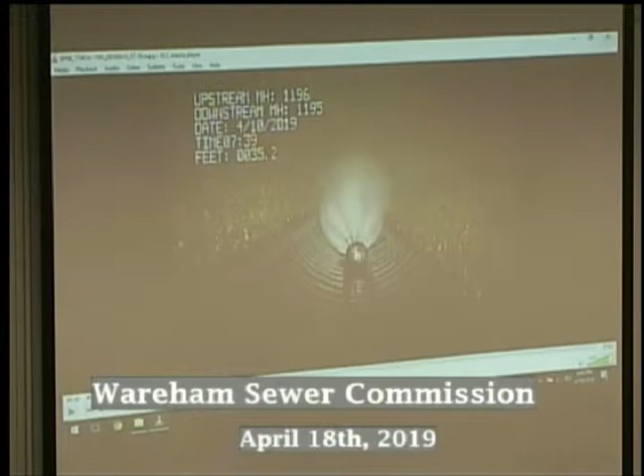Well, Pinehurst is a mess, but I'm sure you've already been told that. It's a tricky job. We're going to have to work with the tides. There's no getting around it. Very short windows of opportunity. But a lot of debris and a lot of junk out there. I don't know if it's from hurricanes or what, but there's all kind of stuff in the ground out there. We run into a situation where at about 5 feet down, it turns into silt sand that you could actually sink to China. There's no end to it, so we got to be careful with that. And we have to think about how we're going to stabilize that a little bit as we go out there.

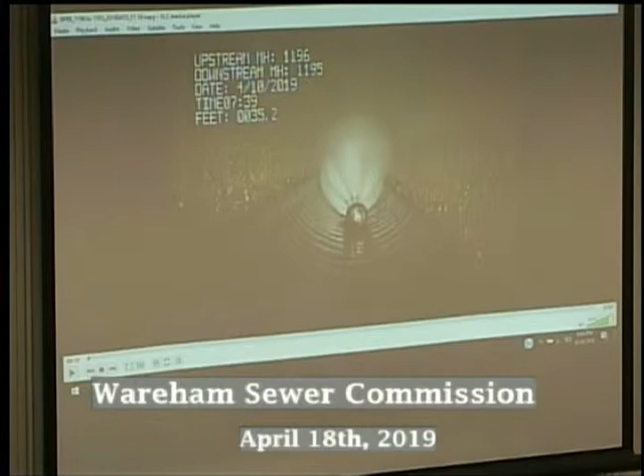Other than that, it's just, you know, a tricky project. Now, is that going to be something that'll be able to be lined? We can line it. We'd want to use double or triple layered woven S-glass, so it'll be actually stronger than steel when you get done with it. Be more ductile than steel. In deflection, it'll be about 4 times stronger than steel, so it'll take a lot more load.

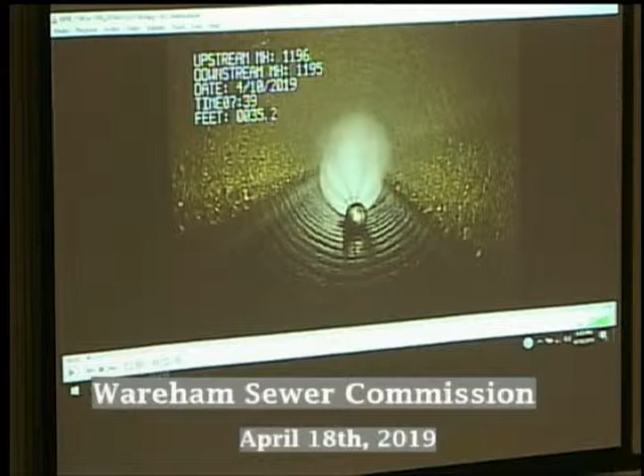So you're going to lose, say, 1/4 inch of the interior of the pipe, but you'll wind up with something with a flex mod of around 1.5 million to 2 million PSI, where steel has 35,000 in that load. So it's definitely an option. You said there was an awful lot of silt there. Once you rebuild the manholes, will they have to settle again?

Well, I don't think they'll be nowhere near as apt to settle because they'll all be one continuous piece of material. The liner will be monolithic, not segments every 20 feet the way it is now, which is subject to lots of problems. If you start getting a leak in a joint, it'll start pulling the sand in and make a hole underneath. So you're going to get away from that. And then the liners will also be tied to the structures.

And I was suggesting to Guy that as we go from manhole to manhole, we should stabilize all the soil underneath with a grout material that will gel up all that sand and stop that sinking and make it somewhat more buoyant at the same time. So instead of just pushing down through a little bit of sand, you'd be pushing down through a big mushroom of this material. So I think we're going to stop the sinking completely, to be honest with you.

How far do you think we're going to have to go on this whole thing? How far do we have to go? I would do anything that's out on that beach, because you can't go back to them a dozen times and say we need to go out on that beach again. So I think we need to go right around that point. And once you get around that little cove, it goes back up into high land, right? It goes back up Cottage Street, yes. Yeah, everything in that cove needs to be done.

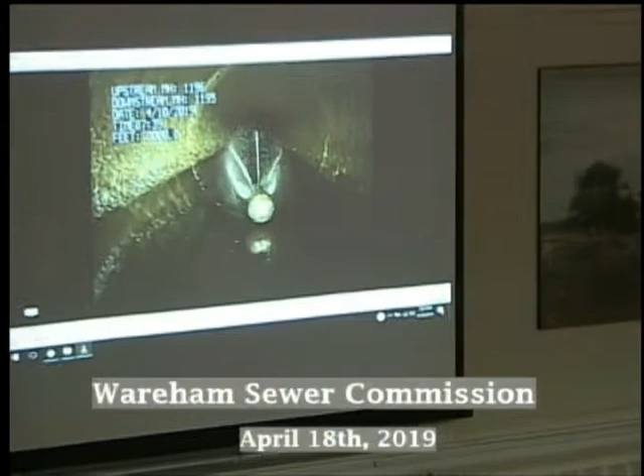Okay. Now you want to go. Okay, so we'll put that aside and go to the film. Now, what I have here is the video of the pipe before we lined it. As we go down, one thing I want to point out, you can actually see the ribs. Not the actual metal, but you can see the ribs because the concrete is that deteriorated. This is before, so we'll show you that, then the finished product. This is 20-something minutes, so we'll just give you segments of it.

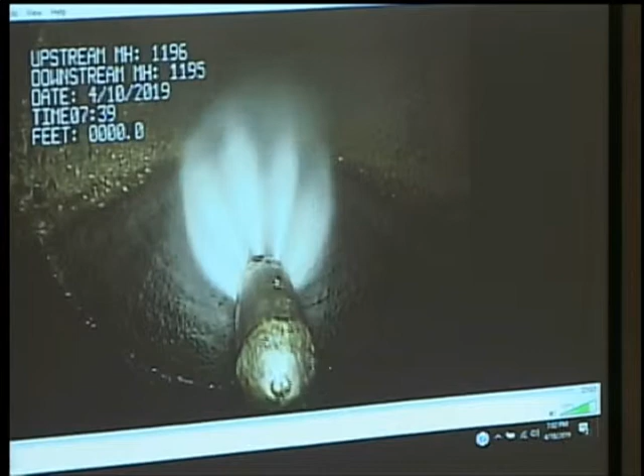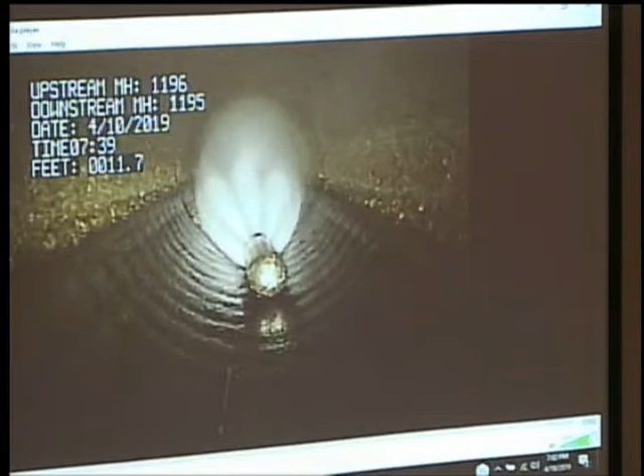Is this the jet rotor? Is this the Swiss Beach one? Yes. They're cleaning it before they actually do the lining. So tell us what we're seeing. What's the bottom and what's the top? You're looking at two different materials. The dark down below is where the water level pretty much always stays, so bacteria has been eating the bottom. At the top, where it looks like little rocks, that's where the bacteria has oxygen, so it's a lot more active. Every 4 inches there's a rib. That's the reinforcing wire, the inner ring, the circle, and the outer rings in longitudinal. So we've lost a lot of pipe.

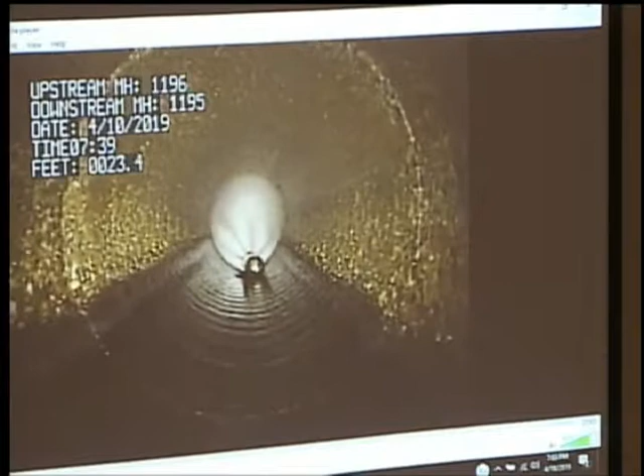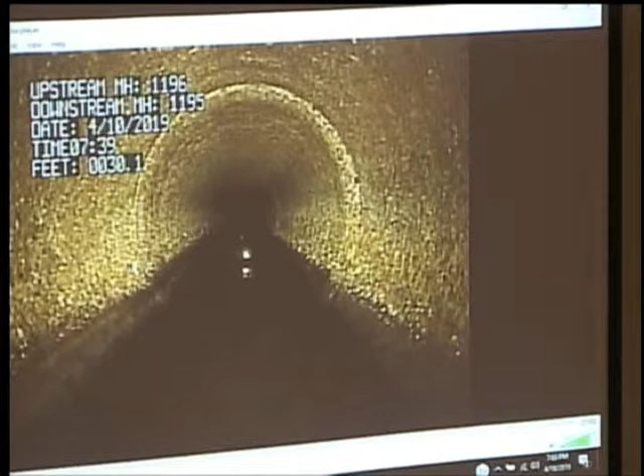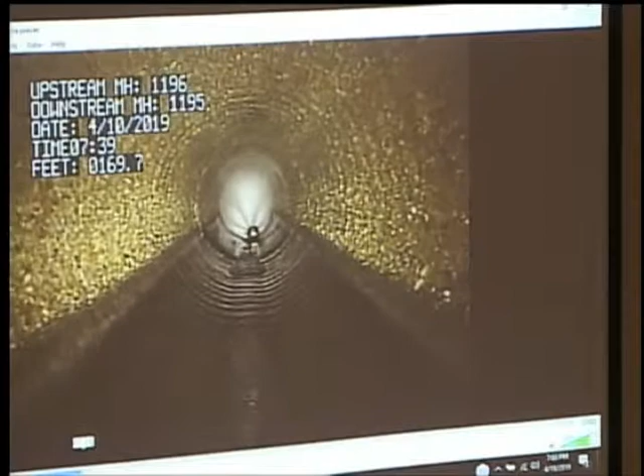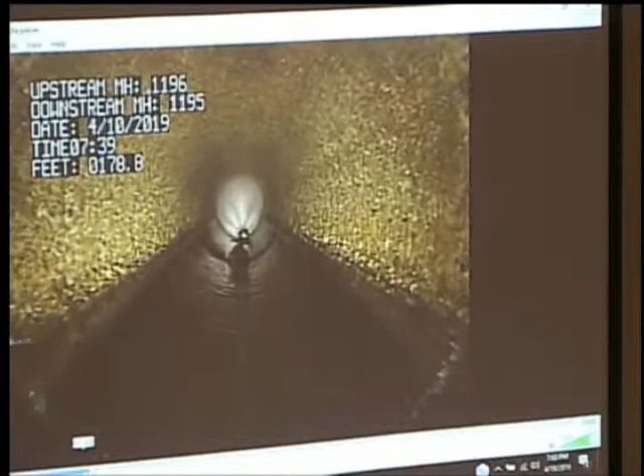SEA engineers in Boston figured all this out and put it together for the MWRA with the loss rate and that type of stuff. But it's true. You go back and look, and it's amazing how much you lose once it gets through that cream, because that's what's blocking the fumes, the acid, from getting into the concrete. What's that ring right there? That's a joint between pipes. It's a joint? Yep.

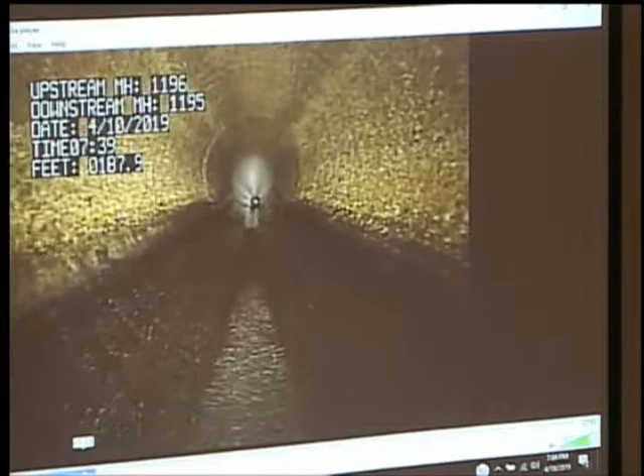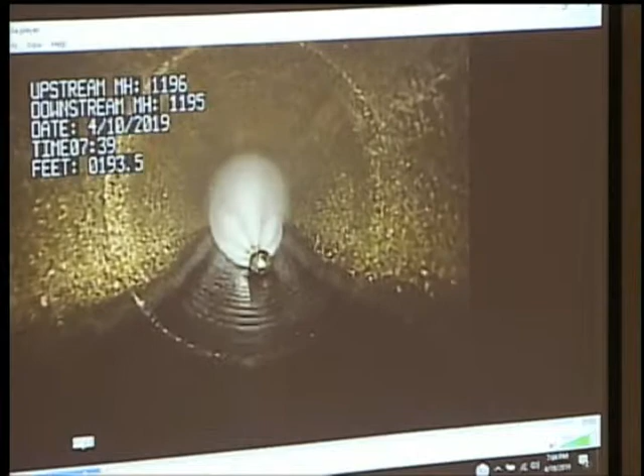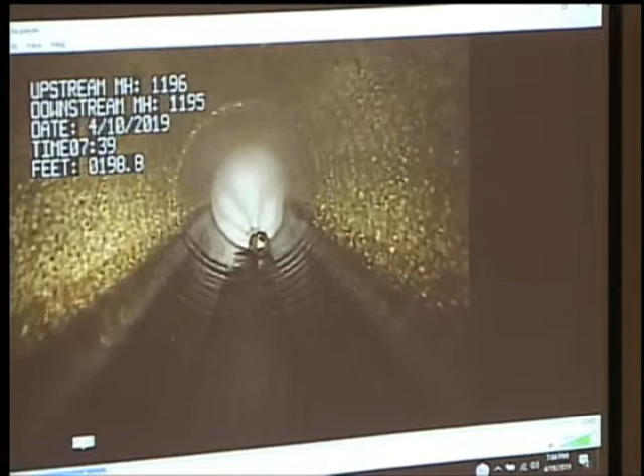See, that's what I was saying before. Once you line these, even on this size pipe, we've engineered these bags to be stronger than that was when it was brand new. So that can totally go away. It's great you have it, but you don't need it. So now it's one continuous monolithic piece of plastic and reinforced fiberglass the whole distance.

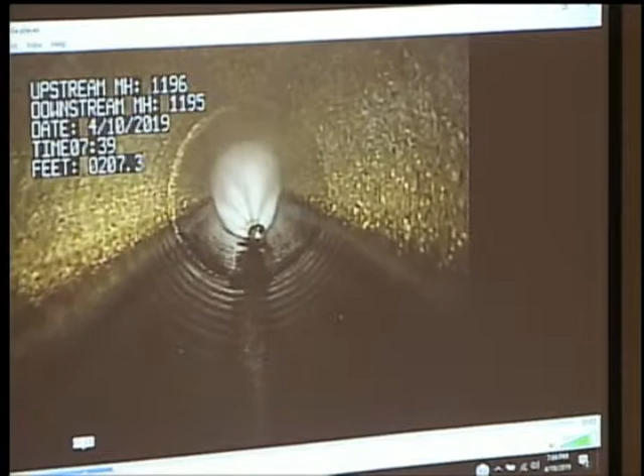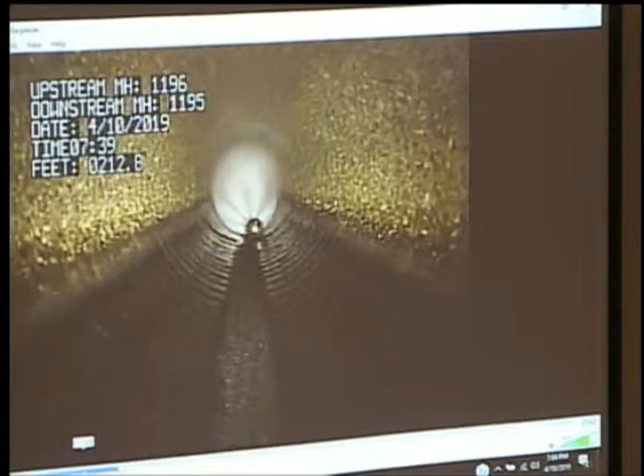No, it's just like an extruded piece of pipe that just doesn't end. Yep, yep. What we do is we know the measurement. We add another 15 feet to each measurement, so there's no chance of falling short. And then we cut those pieces out so we can come out into the manhole. We leave a bevel so we can tie the whole structure together as one. So then the whole structure stays as one.

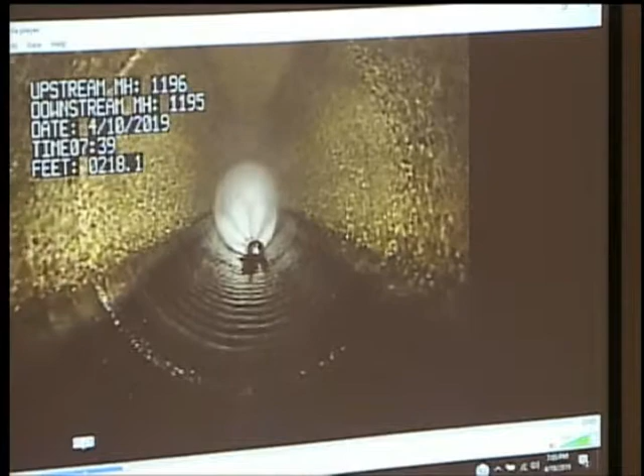And just to point out, one of the features is because it adheres to the pipe. Most lining is a pipe within a pipe; there's no adhesion. This material actually adheres to the pipe, becomes part of it to make it more structurally sound. See what it did to the brick? You can actually see how we had to, so that's an example of adhesion, and that makes this unique.

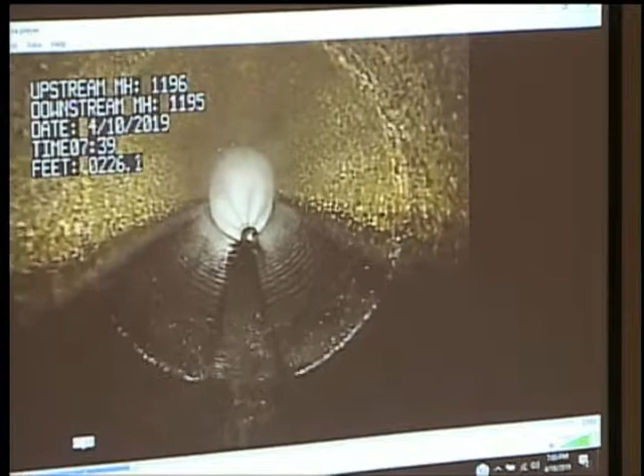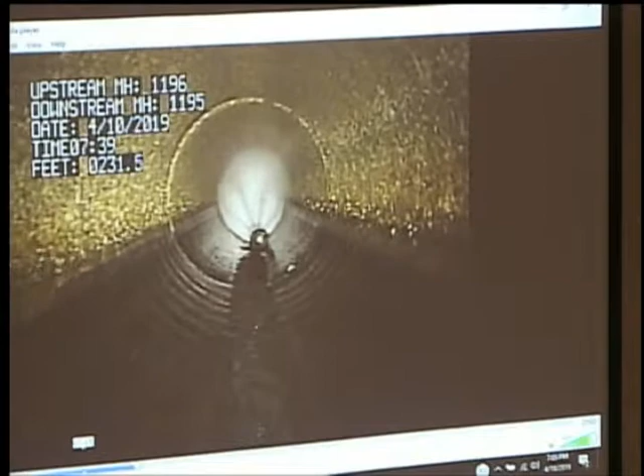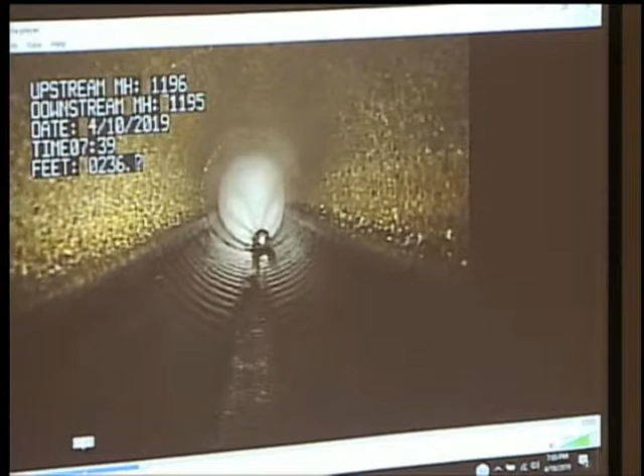Now, here's the other thing. Up in Revere right now, a friend of mine has the contract. They went in with one of our competitors and lined the whole town and were like, yippee, we're out of this. Nope. The situation got worse instead of better because they didn't stick to the pipe. So then the pipe was carrying the water straight to the next manhole from leaking around the pipe. It takes the least path, dumps out into that manhole, goes into the other pipe and goes straight on to the treatment plant.

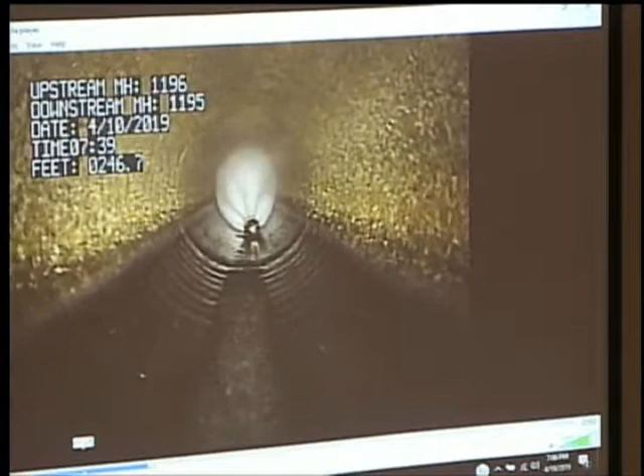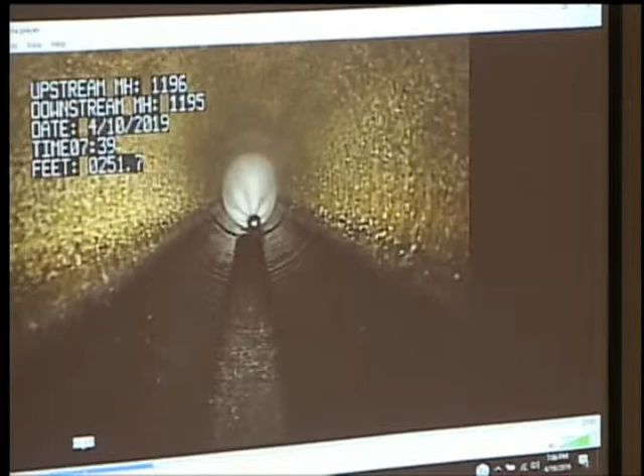So they thought they were done. They weren't. They just issued a multi-million-dollar contract because now every lateral has to be lined, every manhole has to be tied in, everything has to be done, and they weren't expecting it. And I was with the mayor of Quincy two weeks ago at the DEP. There was a congressman there. They've spent millions and millions just to find out that it didn't work, and they are absolutely livid about it.

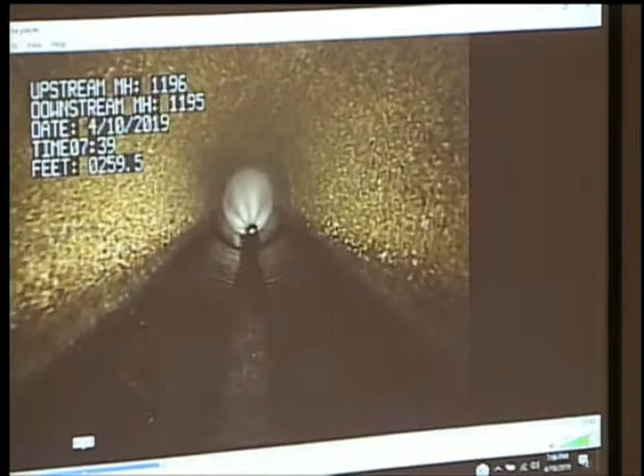Now, we've gone 255 feet down here. I haven't seen any connection point, or would I? You will see one. Some of the lines don't have but one or two, some might have 15. This one, I think there's one in this one. Now, that's another thing about this, where that lateral goes up to the house. This is what they're facing up in Quincy, Cambridge, all over the place. That lateral leaks because they don't connect.

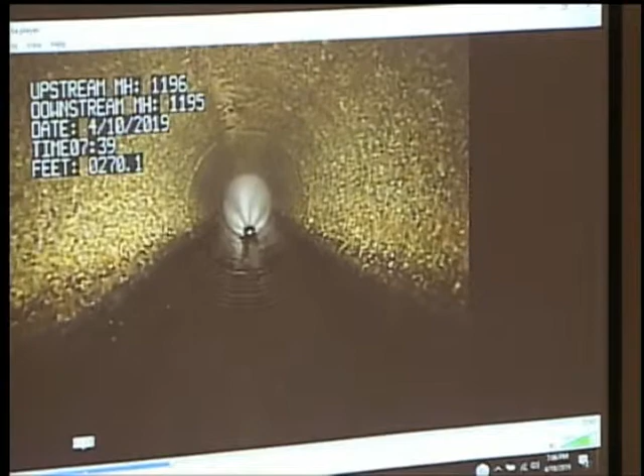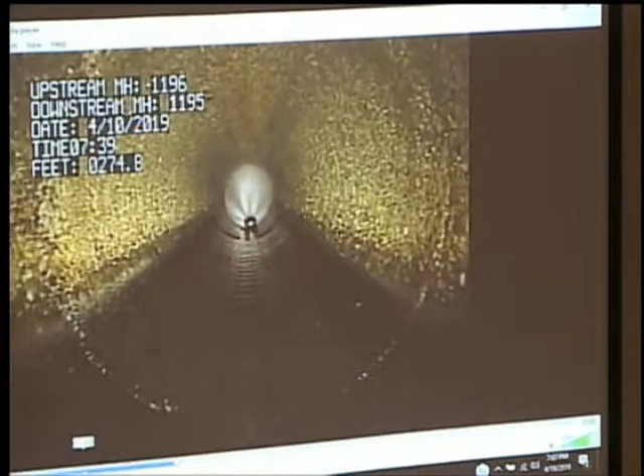When this liner's going forward, there's like a ring, like a donut of raw resin, the excess resin as it's pushing forward. And that ring fills in; like you'll see when we go back through, every imperfection in there is going to be sealed off. But it pushes up in the lateral going back to Mrs. Johnson's house. And you'll see when they cut it out, that resin went up inside and locked those two together, so there's no leaking at all.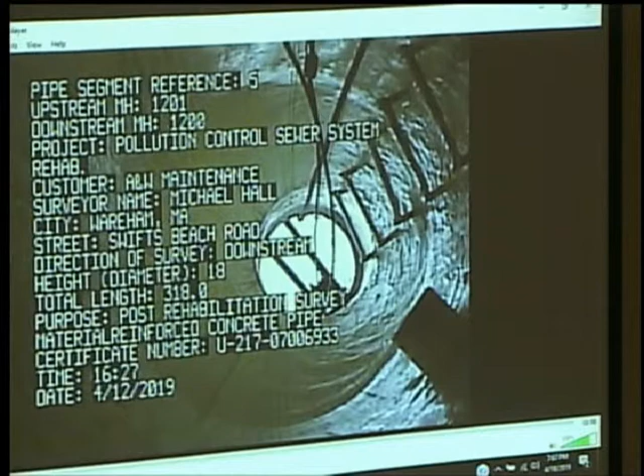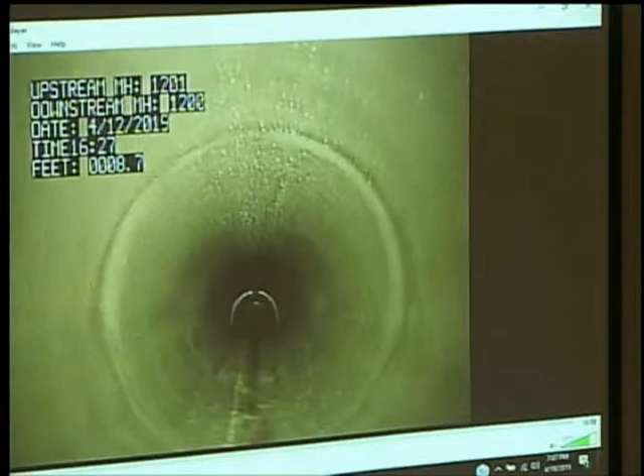So now we'll show you a lined pipe, because this is just going to continue. We'll show you a pipe that's lined so you can see for yourself the difference. It's manhole to manhole, they named them. So what we did, just so we could keep the job alive when we had the nightmare of the wrong liner, we did the manhole, so we'll go back now and tie everything back in together. We're gonna do that this week while they're fixing the repair. But this is the finished product.

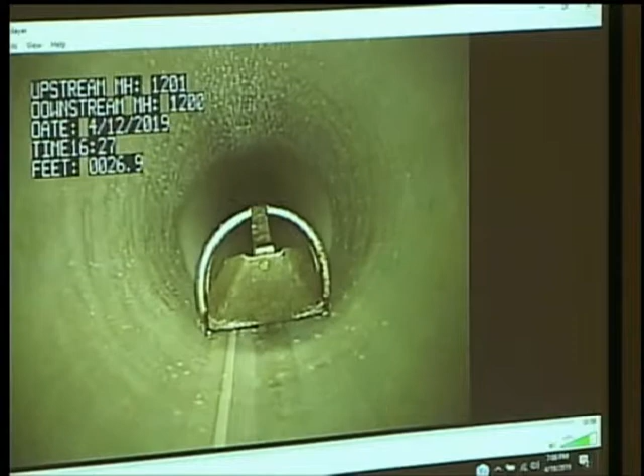Is this the same pipe? Yep, same pipe. And what you see dripping is the jetter washing it right in front of them. So they're taking out all the stuff from cutting out the laterals, and they're washing it one last time for the picture. See, I thought it was condensation. No, and you can see the water up in the front. Look forward, way up. Oh, yeah. You can see it draining at the bottom. Yeah, they're blasting it one last time. Oh, yeah, I can see.

Yeah, and you see where that pipe was broken right there on the left side? That whole hole's filled in. And you see things after you've lined it, imperfections that you wouldn't have seen before, because it's just all a maze of broken up rocks, you know? You look straight ahead, the front end of that, it's all dry, basically.

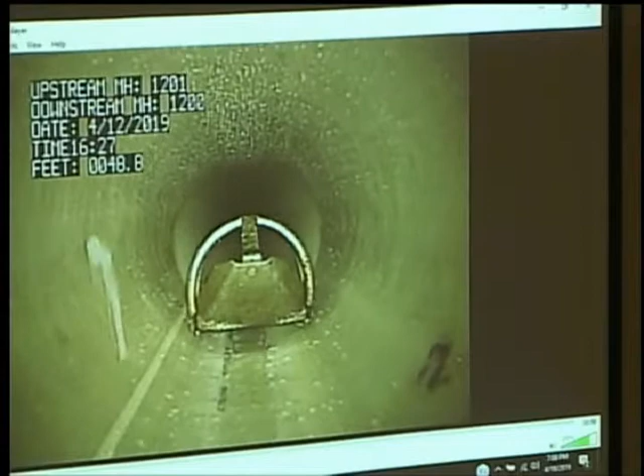Looks like a colonoscopy. I haven't looked that closely in the past. I'm not gonna say it. At least no polyps. They were lined. It's like, that'd be the future, line it.

Okay. So yeah, we saw it before and after. Now look at this one here coming up though. Here's a lateral right here. Oh, that's what it looks like. But it has already been cut out? Yeah, it's been cut out. We cut them out. As soon as we get done lining, we go and we pop those so everybody can use their toilets, then we go back and dress them up, because we can dress them up while they're active.

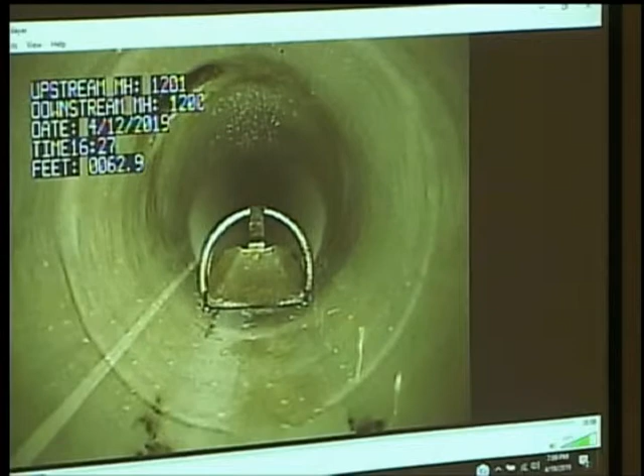We get everybody back online as fast as possible. Is that a lateral? Yeah, there's another one. Does this one show the cutting out, Danny? This other one? That one does. That should, I want you to see how we cut them out too. This is all done with robots. So prior to cutting those, Danny, you can tell where they are?

Yeah, it dimples in. It dimples in, and when we had the problem, and I apologize, but I had to be in the hospital that week for my 1-year checkup on my eyes, and I started getting these horrible phone calls that everything's gone south. It couldn't stretch, so they bored 30 holes trying to find one lateral. And so when I got the call, I came straight home.

And they were going to put in a 420-foot one the next day, and they already had the resin in it, and I said no, and everybody went nuts. And I said, we're not doing another one until I figure out what the heck is going on here. And so then I asked the cranberry farmers, because now you got to get rid of this thing, since I didn't let them put it in the ground. So I asked the farmers, did they want it, if I cured it and cut it up, they could use it for drive-over pipes, and naturally they said yes.

So we blew it up on the ground, and then it was even more clear that it was all defective. So we didn't let the farmers have it yet. We kept it in case we need it, you know, to get reimbursed for some of you guys. It's crazy expense. So we got the new liner. Now we're back on schedule. They're all coming up perfect, as you just saw.

So right now, where are we along the line? How far? Just ready to enter Ripley's Trailer Park. Okay, so we're just about done with Swifts Beach Road. Yes, we are. The bad lining, they're cutting it out, they're gonna reline that. That's the last thing we have to do on that.

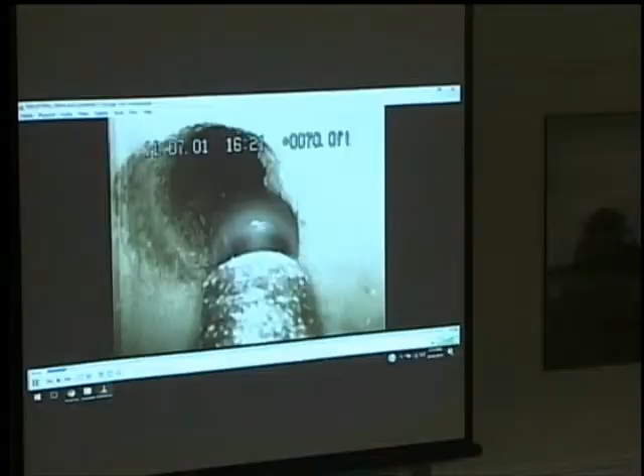So here's the robot, and a young guy is sitting in there with his headphones on listening to music, and it's amazing. But you can see, let me go there so you can see when he's cutting. See how thick that looks? It's like 2 inches thick. That's where that bubble was I'm talking about, pushed up in. Yeah. So he's actually up into the lateral, still taking out the excess resin now, so that whole thing is glued together, so it cannot leak.

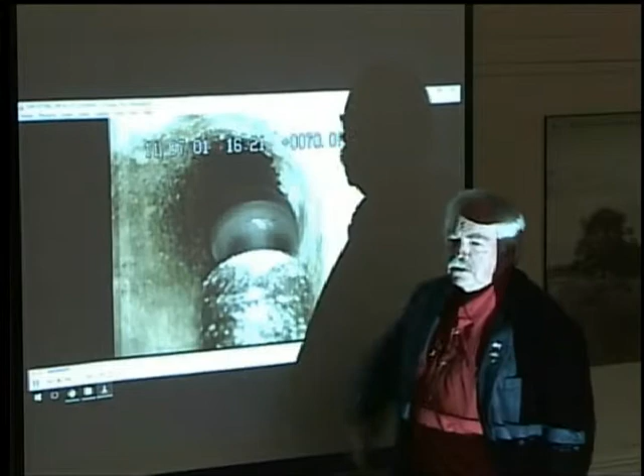If we would have followed that up to the end on the other one, you would have seen it had water continuously running around the lateral pipe into the sewer. It wasn't coming from the people's houses, it was groundwater running in and out, so that resin cured up just fine. What happened with the other liner, it was actually made backwards. The expansion was on the wrong side, so it couldn't do anything.

So after they cured it, I went out and I got 18-inch plastic pipe, so there's no doubt what the sizes were. And I put 3 times the safety factor on the line, and I could still stick my hand between the pipe and the wall. So that's when this giant company, Clark Phelps, sent a vice president in, a troubleshooter, and a lawyer, and I said, before you do that, let me send you a video.

So they called back and said, Dan, get us out of this. I said, well, you're gonna have to pay this. That's how you're gonna get out of it. You're gonna have to pay. That's right, it's nobody's fault but theirs. And I gotta say this for them, they did totally shut the plant down in Pennsylvania and focus on nothing but Wareham.

They turned out a ton of material fast. Another trailer came in today, so we're gonna be right on schedule. Excellent. And it's been flawless since we got the right material. But the other thing that hurt the job was all the people lost faith, like 3 days in a row, all they had was a disaster, so now they're all happy again. Look at the kid. Everything is moving as it should be. Wow. That's amazing.

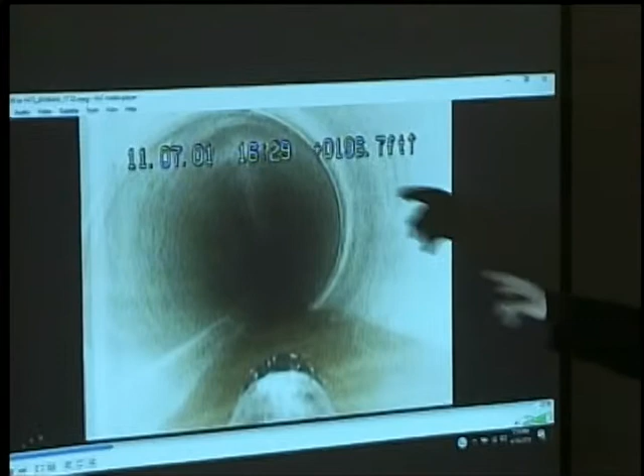So what's happening there right now? He's seeking another one. Yeah, he's going looking for another lateral to cut out. Oh, I see. And right there it is. See that? Can you stop him right there? You come right on that again. See it cut? See the dimple right there? There it is. Look on the top, 12 o'clock. Yep. That's what's supposed to happen.

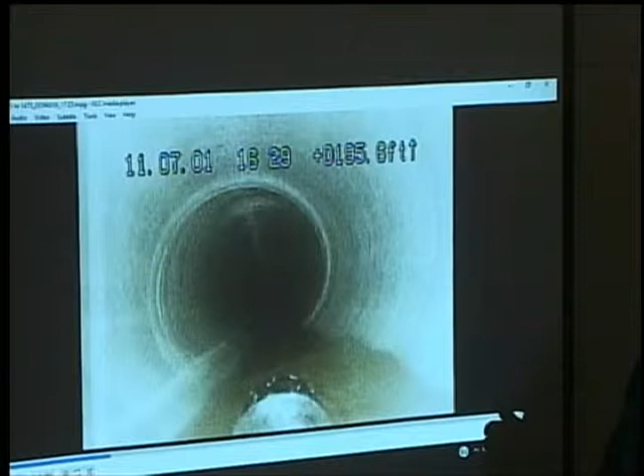They're supposed to push a little resin up in there. But when the liner goes in and you first launch it, you only put it in a couple of feet and you bring it up to 5 or 6 PSI. I usually bring them to 7 PSI. And once they start going in a little ways, then I reduce it back to 5 PSI because you don't want to squeeze too much resin out of the bag. But once it's locked to the outside walls, it acts like a giant plunge squeegee and pushes everything out.

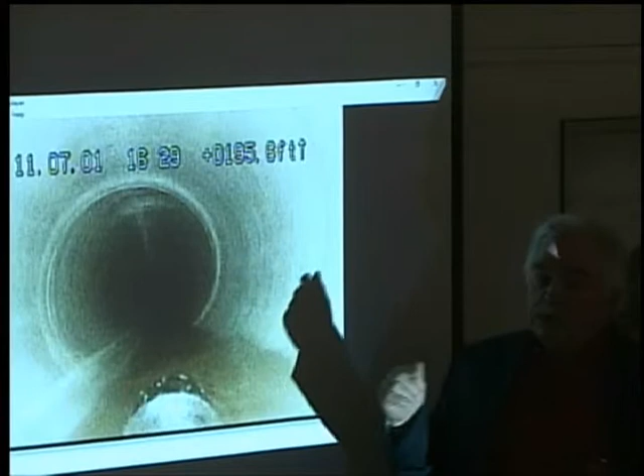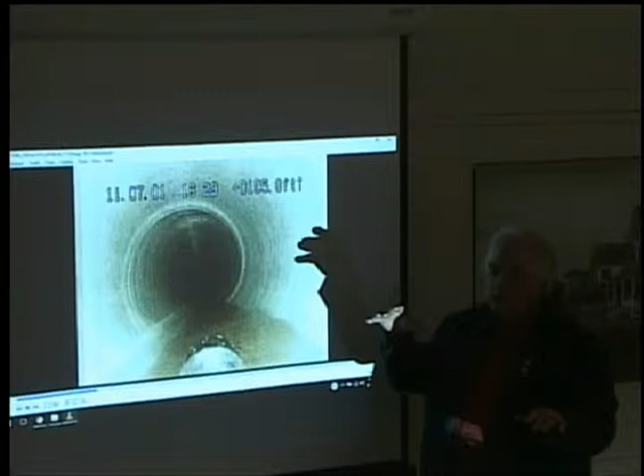The first time I ever did this, you can still see it on the Discovery Channel. Matter of fact, Frank called me Saturday and saw it in Seattle on the Discovery Channel. It was a long time ago at UMass Dartmouth. I lined 1,800 feet of clay pipe that had pulled apart in 3 places under the swamp, under the athletic field, under one of the buildings. And I cut their sewer bill by $500,000 a year on the dry year and $800,000 to $900,000 on the wet year. And they're still tracking that at UMass Dartmouth.

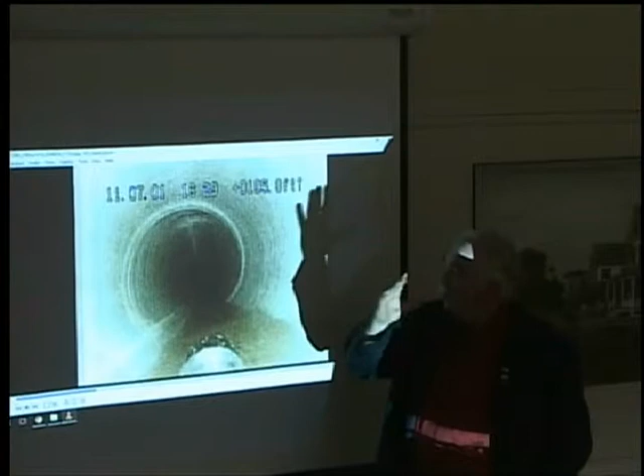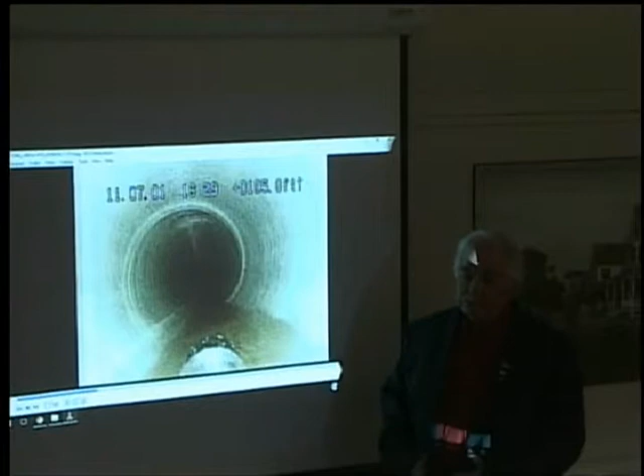So, but there it is. You can see the cut. He goes right there and cuts it out. Now imagine their lines, when they did a line that had 15 of these in it, they couldn't find a damn one of them. All they had then was their pre-videos, and they were taping. Right, you record the linear footage, so you know approximately where you should be looking. Yeah, so they were trying to find one, there's over 30 holes.

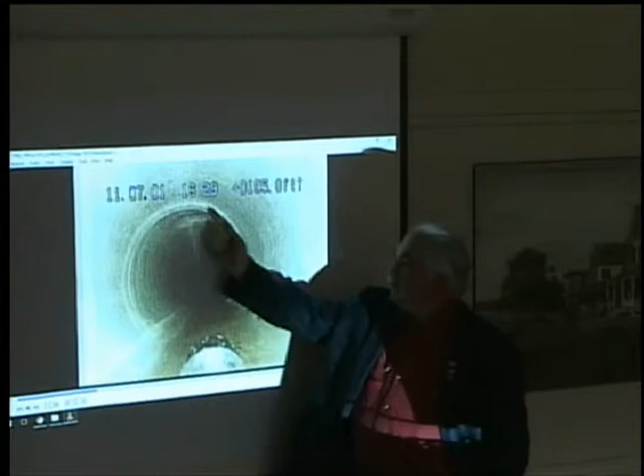And when I saw that, I said, there's no way in the world we're putting another one of these in. There's something wrong here. So, luckily the kid was very good, the minute he got to the pipe, he stopped. And he went to another one, that's the night they stayed out there till 2 in the morning, because they didn't want those people to wake up with no bathrooms. And they finally found it.

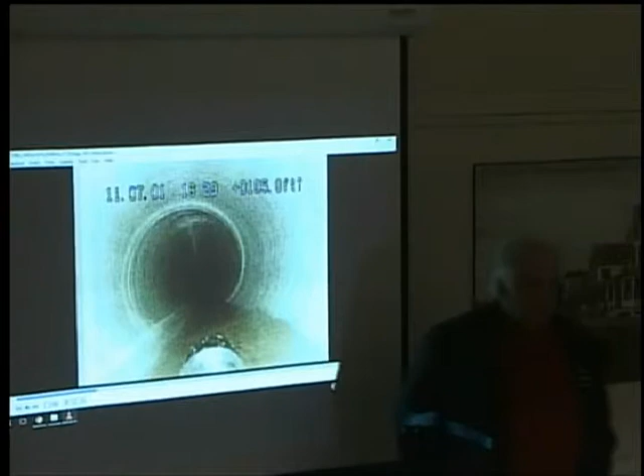Ouch. Yeah, so there you see the cut from the beginning. What he'll do is he'll make his first cut. Those heads are like $600 a piece, they've already worn out too, because the stuff is so hard. And we're gonna give them some more money for that, because they weren't expecting it to be as hard as it is. It's not what they're used to. So he'll make his first cut in the middle, you'll see this very quick, he'll get through this thing.

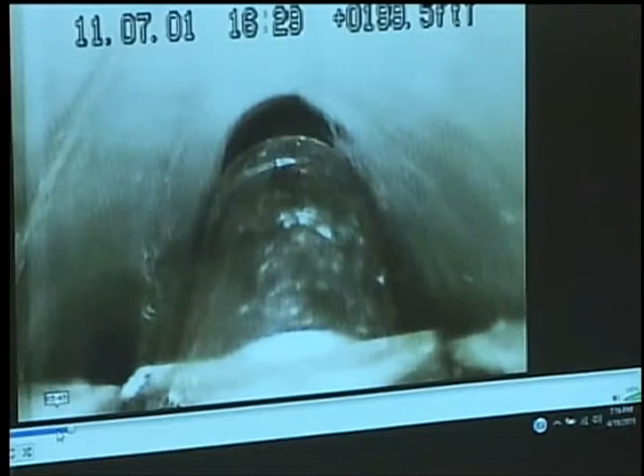So, you know, here comes the water from the bathroom and stuff, and we told people, once we had it in, you can use your bathroom, just come and ask us, and they were good about it, they would call home and say, hey, can I use the bathroom now? That's good. So now he pops through.

Reminds me of a dentist doing a drilling and putting water to reduce the heat. Please don't give him one.

Now, this material that's being cut out will flow down to the pump station and eventually to be treated? No, we back it out ourselves. They do clean the line, but any residual will flow, and it'll get caught in the screening process up front before it even gets into the process. Okay, thank you. It's just something else we gotta clean. So that's it, he pops his hole through, then he just keeps working around till he gets the edge.

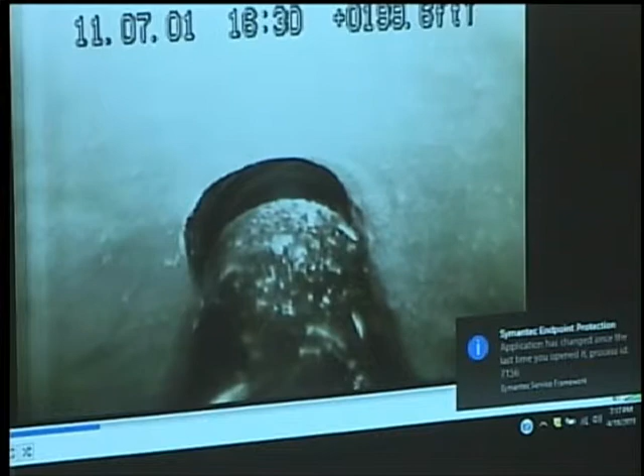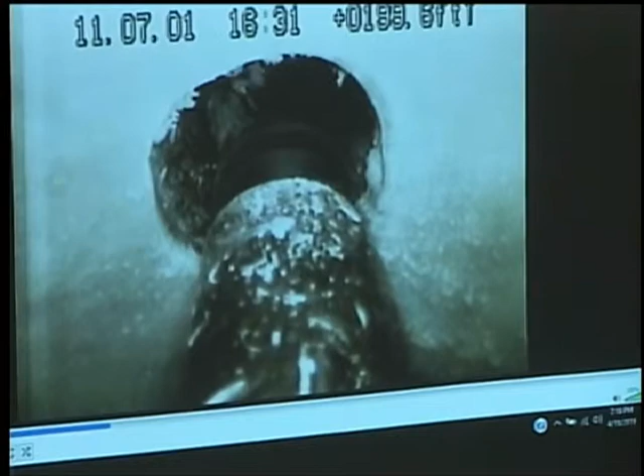When you see how thick that resin's up into that, it really shows how far we push that resin up in that pipe. That whole pipe to lateral connection, we don't have to seal it off with another process. The average cost on that is $2,300 per lateral if we seal that off. So it's just a lot of savings.

Well, thank you. Very good. Thank you. You should be back on track Tuesday, we'll start again and have that process. We'll start at Ripley's Trailer Park and just keep going. When we get to the school, there's some logistics we've already worked through. We're gonna have a set of plans drawn up. I'll turn it to you folks.

Give a copy to the school, police, fire, because there's gonna be ramps there so school will continue. There'll be a bypass, and there'll be ramps for buses, and we'll take care of the ramps for the kids in wheelchairs, and we'll have it all planned out. And we'll get it to everybody before we actually get to that point.

And I got a bonus for you. I'm bringing in another complete crew out of Baltimore. They're coming in on the 25th. So when we get to that school, we're gonna hit that school hard and get in and out of there fast. And then that crew is staying until we get to the end of the project. So we'll be dropping 2, if not 3 liners per day, starting as soon as that other crew gets in here. And they could be here by the 23rd, the very latest, the 25th.

And I don't want to lose sight of the fact that this is new product, it's cutting edge, we talked about it, because it does a good job at protection, it's aquatic safe, and this company is getting used to working with it because no one's ever worked with it, so they're getting better and better, and I'm impressed with their patience and wanting to learn to give us the best job they could, so it's really working out well. I'm pretty excited about it.